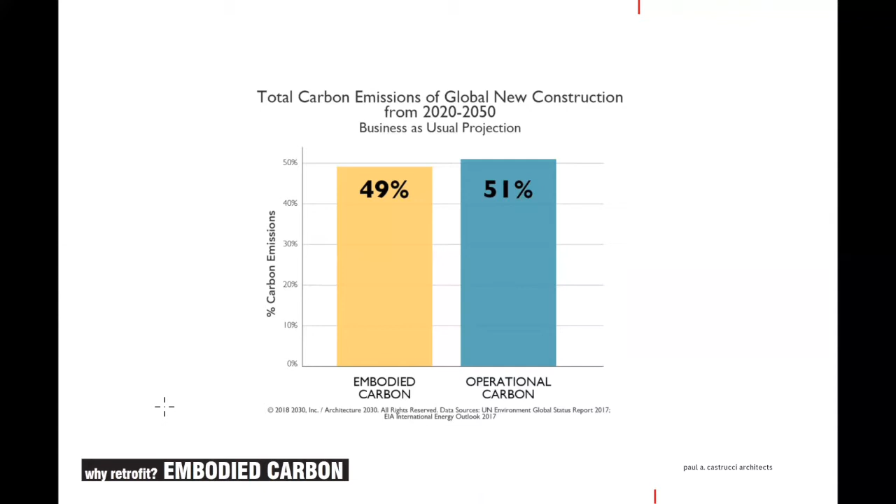There are many, many reasons why we want to retrofit instead of build new. So why would we do it instead of building a new building? Well, energy, carbon, cultural, architectural, and social. So let's talk a little bit about embodied carbon. What we know is that embodied carbon is a huge piece of the puzzle in combating climate change. Here we see in this graph business as usual new construction, where 49%, basically half, is embodied carbon.

Embodied carbon is even more urgent than the total accumulation of carbon of a building over its lifetime. So when we look at standards like Passive House, it's really good at addressing operational carbon. And as we start moving towards more and more energy efficient standards like Passive House, we start seeing that over the building's life cycle, the embodied carbon becomes very, very critical and the next thing to address. And time is also a very critical component here.

You know, we recognize the need to hit carbon reduction thresholds by 2024, 2030, and 2050 to avoid the most disastrous scenarios in terms of our climate. But in this scenario, the carbon saved today is orders of magnitude more important than the operational carbon saved in year 35 through 50 when we build to a Passive House building.

So additionally, we can always reduce operational carbon at a later date, but the embodied carbon we put in today to retrofit these buildings will be released today, and there's nothing we can do about it. So in this graph, what we're seeing is the area under the curve of embodied energy is weighted very heavily in the years that really matter.

And even in our most conscious design, we know that demolition and new construction represents significant embodied carbon, and it's clear that saving existing buildings is possibly one of the most important tools we have in addressing climate change, as well as adapting to Local Law 97. We save what we can, and we always build efficiently, both in terms of material carbon as well as operational carbon, both new and retrofit construction. Grayson now will talk a little bit more about some of the urban and social contexts.

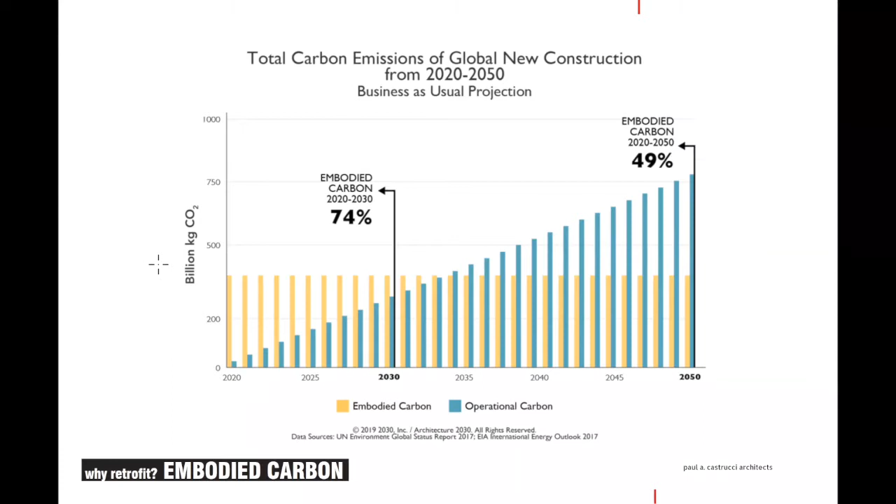Great, yeah, thank you, Ashok. So we're architects who are really passionate about energy efficiency and sustainability, and so there can be a tendency for us to get stuck in the weeds, thinking about technical issues. We really love solving technical problems, and we're going to talk about that today. But first, I just want to put a little bit of context.

We care about cities, and more to the point, we care about maintaining and improving healthy, dynamic, and vibrant cities. And we all know that the best cities are diverse. They're diverse in their culture, of course, but also in their architecture and urban design. And so the places that we really love to be offer that diversity in size of buildings, use of buildings, and style. And one direct indicator of all of those things, size, use, style, is the age of buildings. So we want to preserve cities with different ages of buildings.

At the same time, we know the downsides pretty clearly of the tear it down and build it all new at the same time approach. It can be homogeneous, sterile, lifeless. Look, we need new buildings. We really like designing new buildings, but we just want new buildings to be integrated organically into the context. And with the existing stock, we just want to ask, what is the value of the existing? Can it be repurposed, and can we reuse it?

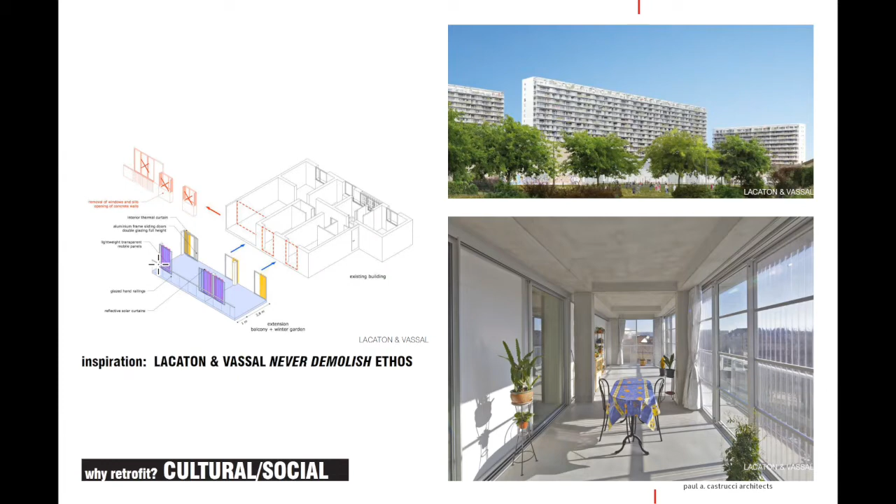Thank you, Grayson. So yeah, a great case study here are two sister projects. They're located in the Lower East Side. These are two co-ops with six floors and about 12,000 gross square feet each.

Additionally, these buildings at the time of renovation didn't have any centralized heating or cooling. There was no insulation in the exterior wall. There were also broken and missing windows, so this caused a lot of draft. It's understandably very uncomfortable to live in. And finally, there were multiple fires, so we also had to deal with the fire damages.

Additional parameters that we work with are limiting our design as well as our solutions. These include the fact that we have a fixed orientation, so we can't do anything about that. The existing masonry wall will remain, and that's about 12 to 24 inches thick. And of course, we can't change windows around or block windows because everybody wants their windows to remain.

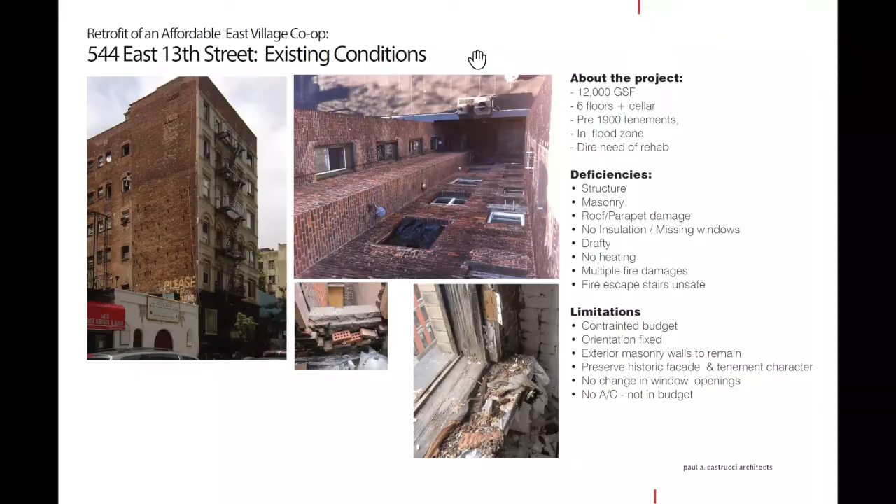And identifying not just the technical constraints, but as Grayson spoke earlier, understanding the unique socioeconomic context helps come up with the appropriate design solution here. Both the historic and cultural characteristics of these co-ops add to the neighborhood's lexicon, which for us is something really important to preserve. So the scope of work here is complete rehabilitation.

We couldn't use the wood joists in the building. They had inconsistent quality because of the fire damage as well. When we started looking into air sealing as well as insulation, it's a lot more challenging. So we decided to replace the floor, the joists, the roof, as well as the slab. We added new structural steel to support the new floors and address the deficiency in the masonry.

Other goals we have here are to design it to EnerPHit Passive House standard. We also designed this building to the Enterprise Green Communities Standard, which is a very comprehensive standard addressing affordable housing projects. It's a national standard, and it's not just looking at energy efficiency, but also indoor air quality, material selection, health, and so forth. So we've built it to the Enterprise Green Communities Standard as well.

Of course, we have to comply with existing building codes and provide healthy and safe space. The goal of this project is to convert these cooperatives into low-income cooperative housing. And of course, we see this as a model project for us and a project that everybody could learn from. So we also monitored the performance after a year of continuous occupancy.

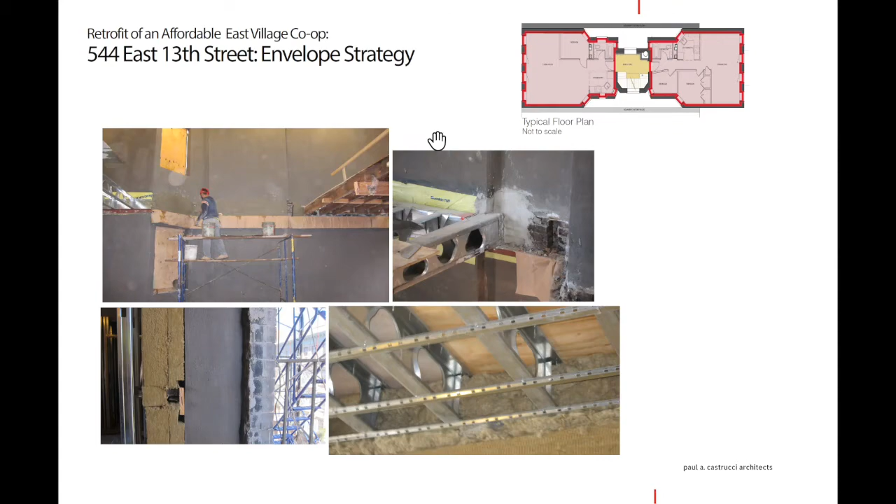For the air barrier, we took advantage of the fact that we're adding new floor joists. We were able to put a liquid-applied air barrier first, and then two layers of rigid insulation, where the steel joist walls meet the floor. We do have some thermal bridging here, as well as some complexity in the air barrier. But what we did was add insulation in the floor joists for at least two feet. When we modeled it out, we found that it took care of the thermal bridge, and we added additional air barrier to make sure that it's airtight.

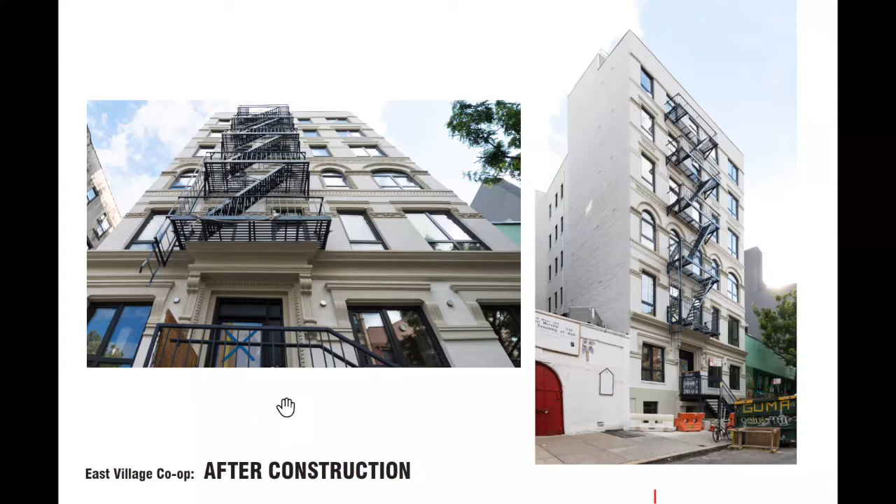So the next slide, we have some photos of this project after it was completed. We used triple pane windows and also installed the ERV system, a centralized ERV system. We did consider electrification, but because of the budget, what we did instead was we installed new and higher efficiency boilers for hot water as well as the heat. And there was no budget in this building for a centralized cooling system.

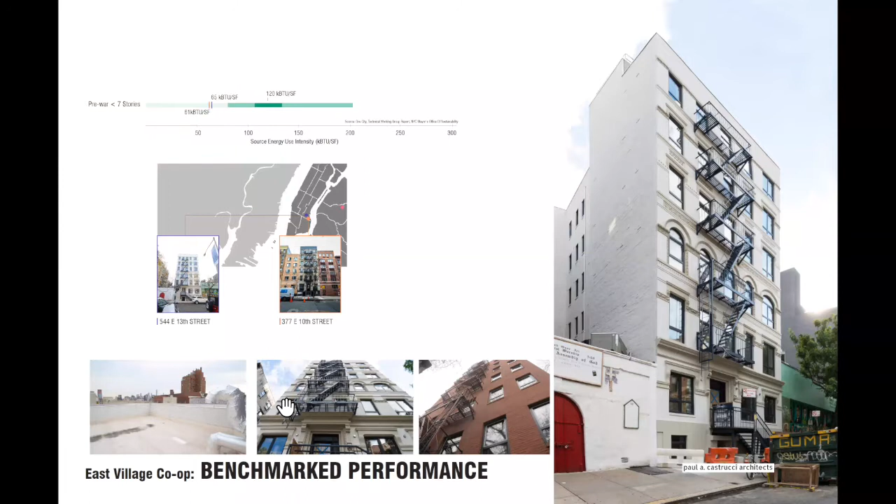There's just one other slide I wanted to talk about, which is in terms of the benchmark performance. So about a year after the building was completed and occupied for at least a year, we did energy benchmark it. And we compared it to the average building that is the same size as well as the same type of use. And what we find is that, in terms of energy performance, we're in the top 5% in New York City. So I think that for us is very, very encouraging. So now I'll hand it over to Grayson.

Moving on to the second case study. This is the Beacon project. It's located in East Harlem. It's actually a very recently awarded HPD RFP. It's a project that we're working on. The developers are the community builders along with Ascendant Neighborhood Development. And we're part of a design team that includes WXY, Body Lawson, and Terrain.

The program for the site is 250 new affordable housing and formerly homeless housing units and a new construction passive house building. That's sort of what you see in the back of the site there. Our role is not the design of the new construction. We are the passive house designers for that, but not the architects for that. Our role as architects is for the front of the site, this sort of adaptive reuse of an existing 6-story building, formerly a school, and 1-story vertical addition.

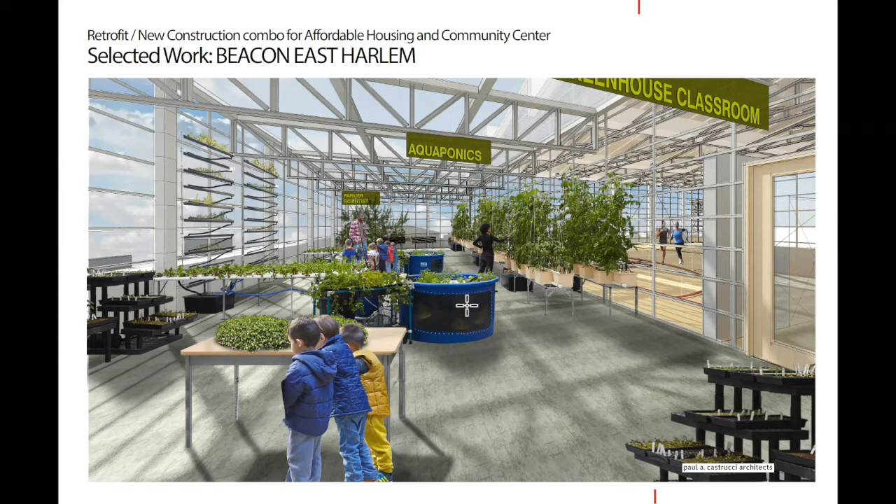Okay, just walking through some of the early design renderings of the space here. We're in that vertical addition. We're looking at a greenhouse that's used not only to grow food, but also as an educational space. Still up in that upper addition, here's a full-sized basketball court. Not shown in either is the multi-purpose spaces for flexible use for the community.

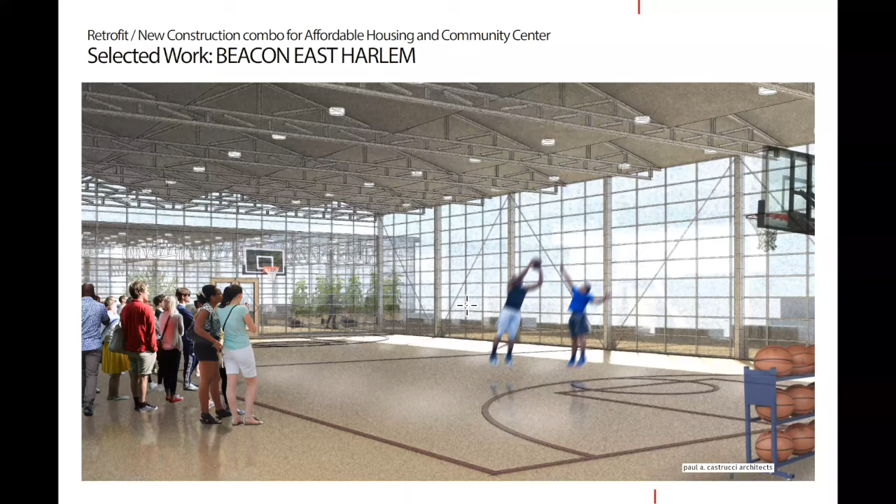As I mentioned earlier, we will be using an approach similar to the Lower East Side retrofit as far as how we insulate and air seal the walls. We're doing it from the interior, tying that into high-performance windows from the interior side. Of course, the roof will be new. It'll be new construction. And again, the sawtooth window with the solar.

Just to sum up our approach to this, we're in the early design phases of it, but we see the Beacon as a good example of the flexibility and remaining flexible when you have really diverse economic, social, programmatic, and cultural needs. Where possible, we want to find value in what's existing. We want to amplify that value and fix what isn't working. And when it's necessary, we want to build new. And in all of it, we want it to be sustainable, considering energy, architecture, and context.

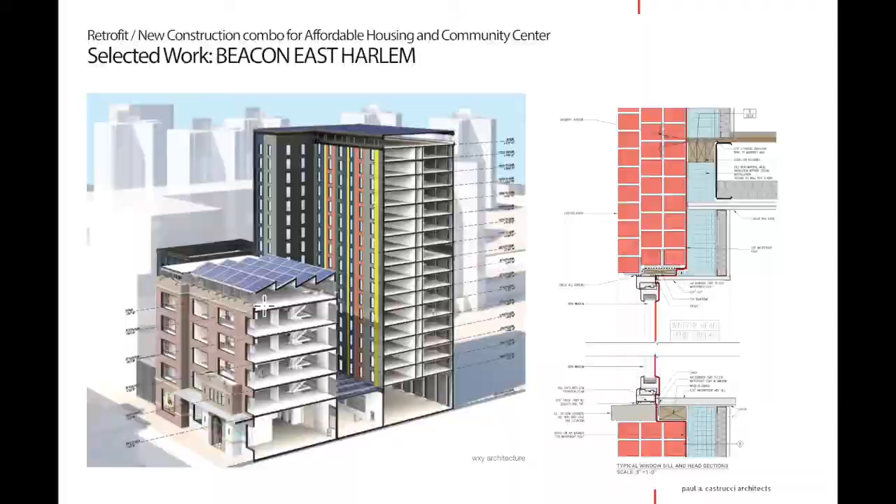Last case study. So this isn't so much a project for a specific site as it is a conceptual approach to prefabricated deep energy retrofits that we expect to see growing in popularity, if not in the next couple of months, then in the coming years. So RetrofitNY is a program from NYSERDA, and it's aimed to promote those prefabricated deep energy retrofits based on Energiesprong. I expect many people are familiar with Energiesprong, which as part of this presentation we'll quickly recap.

But the characteristics of the RetrofitNY approach are that first, we're focused on multifamily residential buildings. In our office, we focus even more on affordable housing. It's going to have a prefabricated wall panel with integral windows that are built off-site, of course, and trucked in and craned into place. It's going to have integrated MEP. And we want to get full building electrification as part of these retrofits.

The idea is for it to be resident in place. And this is a good approach for that, but even in the best case, that can be tricky. We want to get integrated rooftop solar. The energy goal is net zero carbon.

NYSERDA in their literature has stated that they're essentially attempting to create a marketplace similar to that found in Holland, where more than 50,000 social housing Energiesprong projects have been implemented. And NYSERDA sees the solution as a turnkey product-based solution versus what we're used to, which is design, bid, build. And so what we've been encouraged to do and what we are doing is integrating design, manufacturing, client interface, and GC/installation into one service. And that's intended to set the market price, reduce inefficiency, and optimize results.

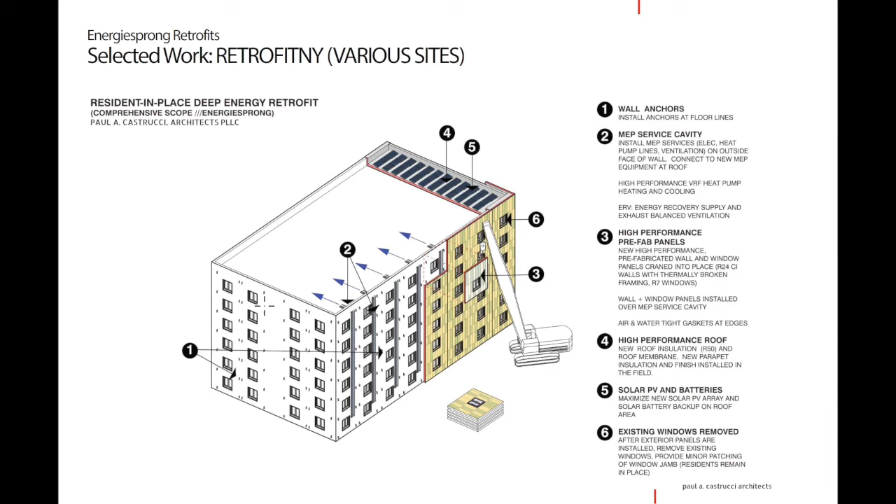The panels, prefabricated panels, are shipped to site, craned into place. The utility, the ERV and HVAC are hooked up at the roof. Well, actually, the roof is installed first. High energy efficiency roof with integrated solar, and then everything's hooked up. And sort of the last step after everything's air and weather tight is you come in, you remove the existing window and heal that finish in that location.

I think I mentioned the NYSERDA RetrofitNY program is relatively young. There have been a handful of completed RetrofitNY projects in the state. I believe Cycle Architecture is currently doing a pilot of a NYCHA renovation demonstrating this concept. And internally, we are working at this on a conceptual and schematic level, and also exploring the program with our clients with affordable and market rate, but also working with professional partners to sort of build up a coalition and also think through the problem.

And one of the problems is, what's the ideal case? What kind of buildings are we looking for? I would say NYCHA buildings are, in many cases, an ideal candidate, because what we're looking for are, first of all, freestanding buildings, if we can get them, with good access all around. You can imagine not only are you shipping in prefabricated wall panels from another location, but you need to stage them, you need to have space for a crane.

We're also looking for buildings that aren't performing well energy-wise. This is not an insignificant investment, and so we want to make sure it's really decreasing energy cost to make it a valuable implementation. For the same reason, we're also preferencing affordable housing. We think this can really improve long-term affordability.

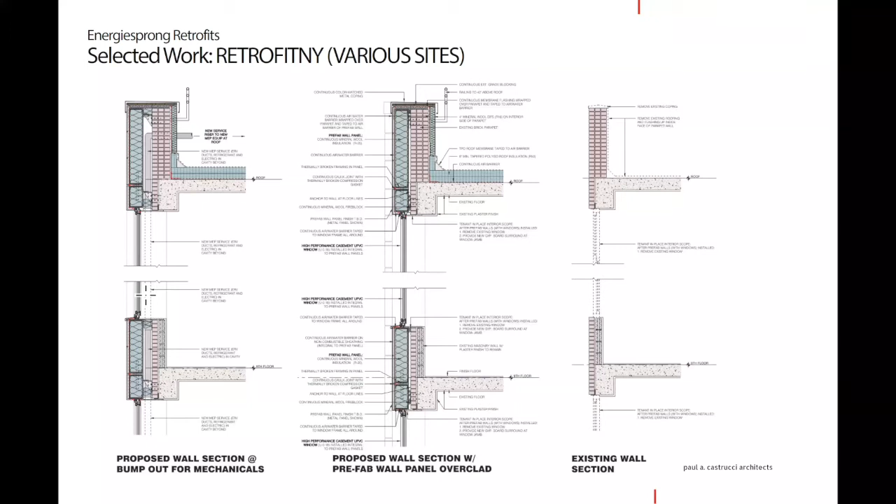And finally, we're excited to continue to collaborate and learn from other designers, manufacturers, and engineers, from our colleagues, from you basically, in developing and improving these solutions. We thank everybody for your time, appreciate you listening, and are happy to answer some questions.